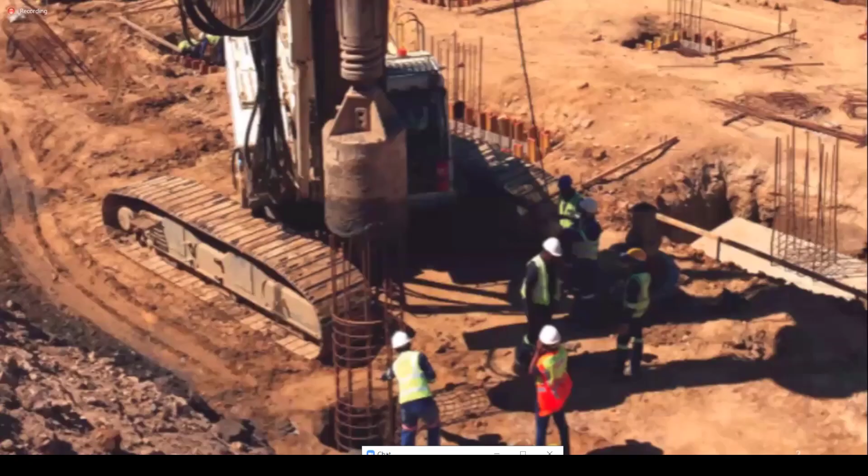So in this course, the emphasis will be on reducing the gap between academics and industry. Briefly, whatever we have shared in the course poster, you might have some doubts about the course content, how we will proceed, the course duration, timing, and other related details. So I will briefly go through the topics we have finalized after discussion.

Firstly, we will go to the basic fundamentals of soil mechanics, what soil mechanics is, since this course is mainly related to geotechnical engineering. So we will cover the basics first, we will recapitulate the principles of soil mechanics, the backbone topics of geotechnical engineering.

The second item I have put here is why geotechnical engineering, the history of geotechnical engineering, the future of geotechnical engineering, and the current state of practice, especially in industry. The items we have finalized are based on priority, based on current importance, and what is ongoing in the geotechnical field.

For example, design and principles of reinforced earth - on this topic we have already presented in a webinar. Another topic will be application of geosynthetics. Geosynthetics is a field where currently lots of work is ongoing, both in industry and academics, and this is a highly prioritized, top demand topic.

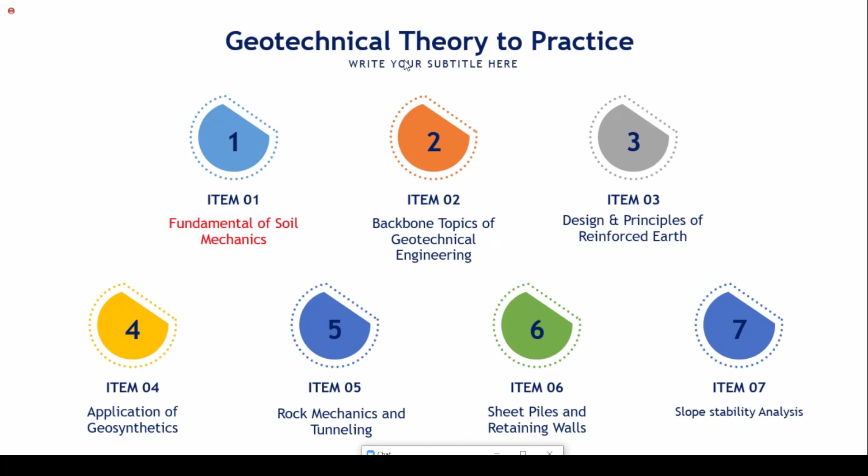So another topic we have finalized is the dynamics of soils and foundation. This is very important because of the currently ongoing industrial development and major urbanization. We need to focus not only on normal foundation structures but also on the dynamics of foundation and soil dynamics, which we used to call combiningly. This is one of the vast topics, and we'll try to cover the major missing links on this topic.

Another topic is the structural design of foundation and retaining structures. There we will cover all the structural aspects of foundation design and retaining structure design. Through this coursework we will cover all the basics, solve some numericals, and include real life case studies. We will show real life phenomena and how to deal with them using software or other numerical tools, going from real life problems to academic problems and how industry deals with these problems.

Soil anchor will be another topic. Anchoring is an important part of geotechnical engineering. Finite element modeling is also one of the important topics. Most textbooks miss this topic, but without it the industry cannot progress, because finite element modeling is essential to solve many geotechnical problems, especially field problems. If we want to do future or research analysis, we need to predict behavior through finite element models. Through this part we will learn many software essential for geotechnical engineering, how to use them for modeling, and how to achieve prescribed outputs for geotechnical problems.

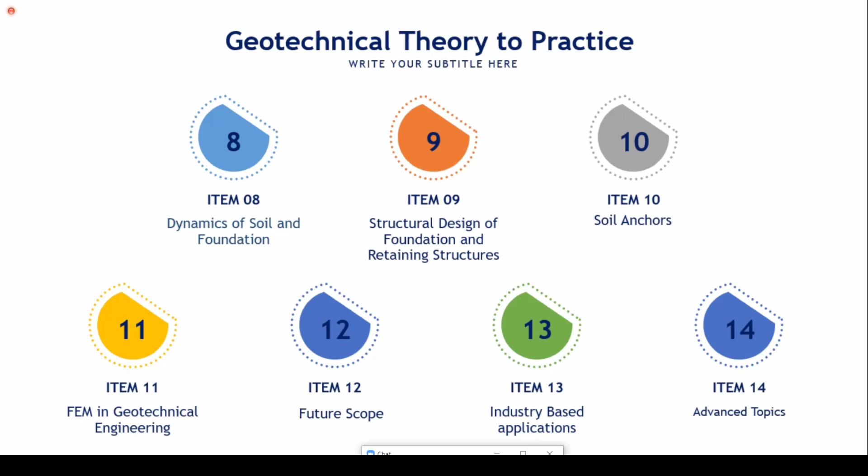Item 14 will be some advanced topics, which will be discussed gradually through the course. And then, what is my area of interest? If somebody asks you your area of interest, that is very difficult to understand—at the beginning of your career you cannot decide this is my area of interest. So this is one of the important questions, and these questions will be highlighted throughout each topic, on how you can generate your interest.

Of course, all the content will be very interactive, through any mode of communication. We'll discuss with everyone what are the difficulties or what their vision on this course is, mission as well as vision. Each and every topic has some different flavors, so we will try to highlight each and every topic in different ways.

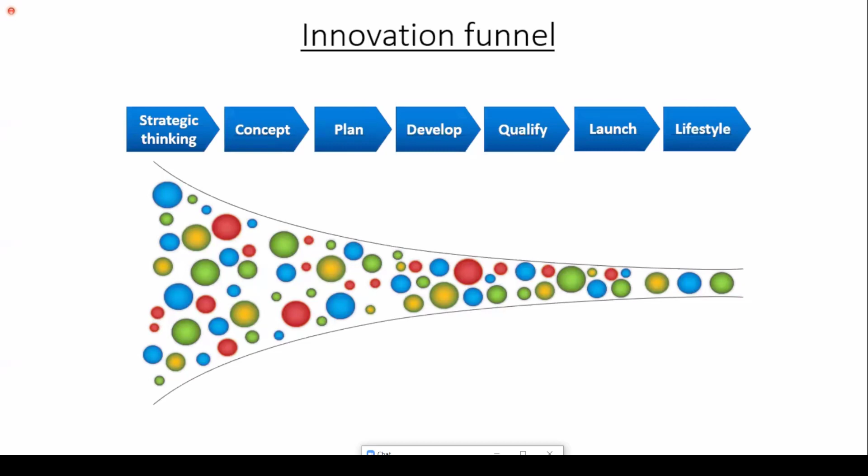Geotechnical engineering, theory to practice - in a nutshell, what we are going to study in this course. I am highlighting again the fundamentals, principles, basics, and we will clear doubts on each and every point, bringing clarity on the subject.

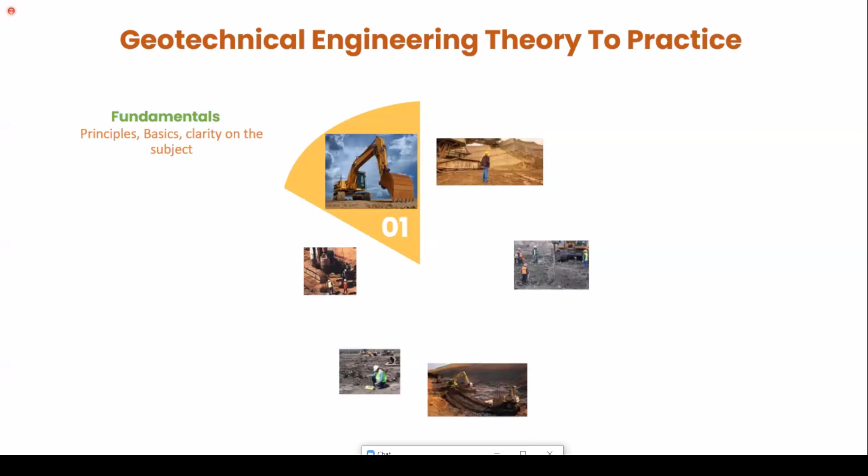Second is industry-academics collaboration - that will be one of the major prioritized things, focusing on real life problems, real field problem solving. Third is the job perspective: what will be the job scope, opportunities, and current scenario in India.

For example, one topic I didn't include deliberately in our outline is earthquake engineering, or geotechnical earthquake engineering. We covered it in the form of soil dynamics but didn't mention earthquake engineering specifically, since it's a bit saturated topic in the current world - a lot of work has already gone on in that area.

So what are the incoming, catchy areas where industry will more emphasize and focus, especially in the Indian development scenario - Indian current commercialization and rural development scenario. What topics are important - those we will highlight. So each topic will have some job perspective, what the job scope and scenarios are currently.

Fourth one is advanced topics like anchoring, piling, nailing - field related problems. There will be field demos also. We'll show field videos of what problems happened and how to deal with those problems.

Fifth, we can say multidisciplinary topics like geo-environmental aspects, such as the chemical aspect of black cotton soil, where multiple disciplines are involved - those things will be highlighted. This is one of the major interesting things about this course, because currently in industry-based applications, almost all topics are multidisciplinary.

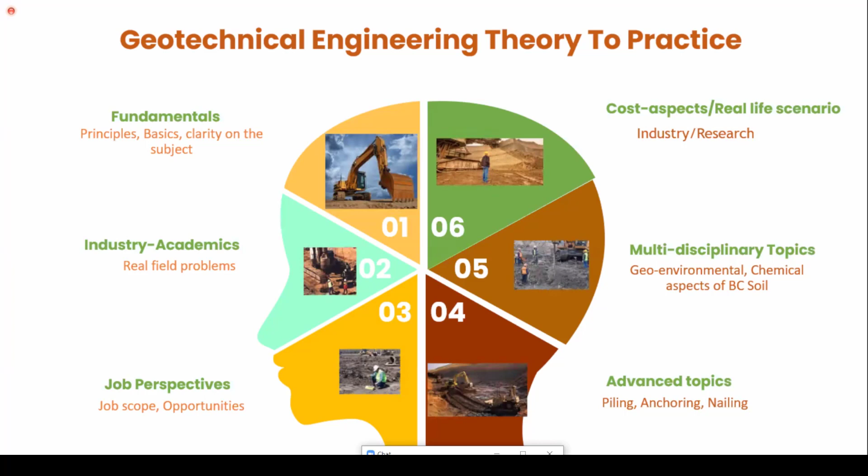What is the cost aspect of any design or project? For example, what is the cost of soil anchoring? What is the cost of soil nailing? What are the alternative methods and alternative things available? For example, in ground improvement, each topic has its own cost considerations. The cost benefit analysis, in more technical terms, of each topic will be a focus through this course.

So briefly, what we... real life part. Hello. Hello, sir, yes sir, we can hear you, sir. Please go on, okay please.

The most important part will be real life geotechnical engineering, because it's already clear that civil engineering cannot happen in the office or at a desk job - it's real life engineering. So we need to focus on the real life part of engineering, as well as basic design principles and numerical tools, and different aspects like basic principles and advanced topics, which is where we will focus in this course.

Another thing is that geotechnical engineers are mostly called in at the last minute. We should not wait till the last minute to involve geotechnical engineers. Just a reminder that geotechnical engineering is involved in every aspect of civil engineering.

For example, transportation engineering - transportation or any pavement cannot be constructed without knowing the substrata or geotechnical behavior at that particular site. Similarly, for structural behavior, we need to know the foundation and soil behavior before constructing any structure. Environmental engineering is also one of the major parts - water also deals with geotechnical engineering, how local geology and geographical behavior affect it.

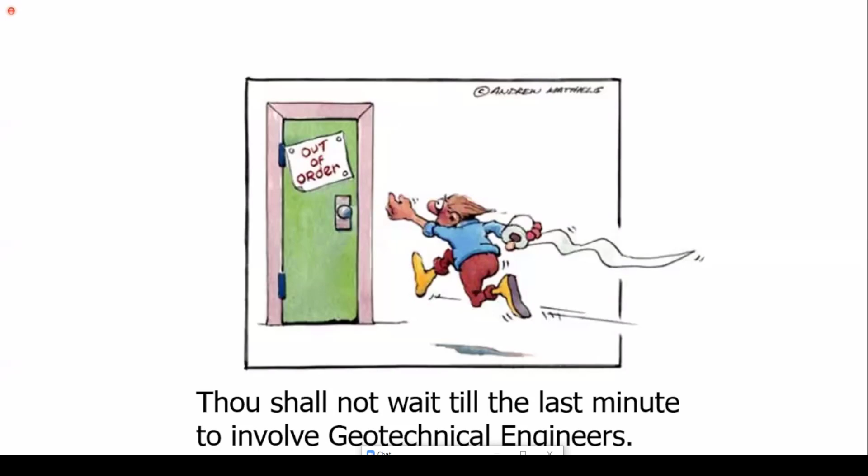So it is a multidisciplinary thing, and there are many other disciplines involved. We'll focus on all the 14 items we have discussed, with clarity about the dependency on other disciplines through these topics.

Briefly, to conclude the first part of our lecture, I will highlight the major highlighted things in our course. Soil improvement will focus on chemical injection, chemical stabilization, mechanical stabilization, and different cost comparisons of the current state, to decide the best suitable ground improvement technique.

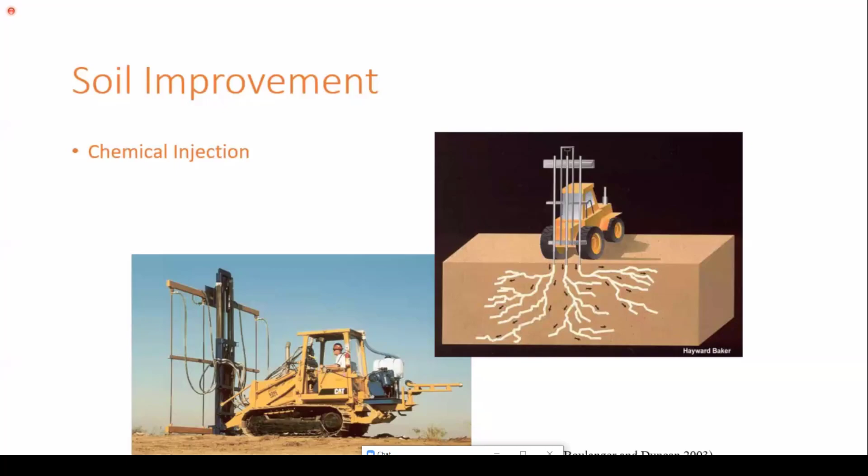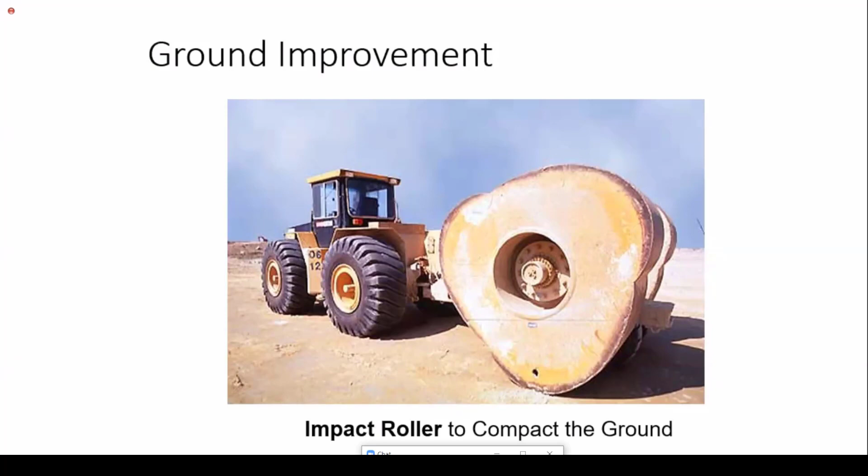There will be handouts distributed and videos shown on how to choose any ground improvement or soil improvement method, like rollers, or mechanical vibration. Every scenario, from abroad to Indian, will be considered in each and every topic.

Because of natural deposits, soil slopes, slope stability will be an important topic, as I mentioned. We'll look at the applications of slope stability, the software currently used in industry for slope stability analysis, and recent developments in this area.

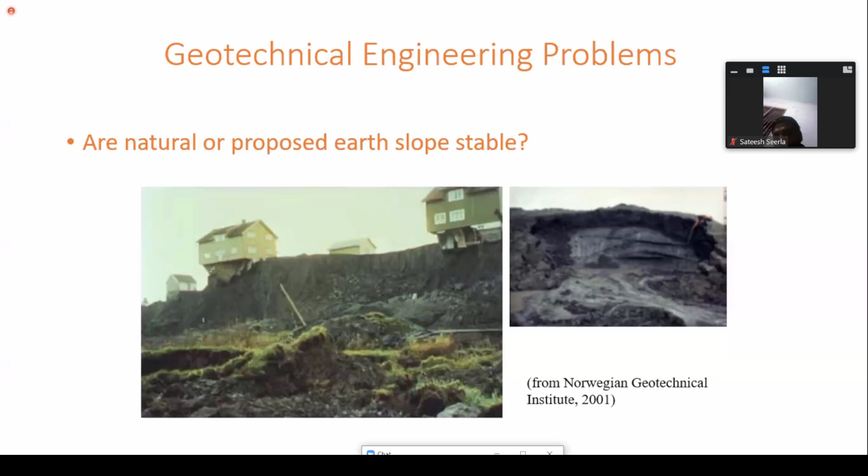This will focus in the course on unstable slopes, how to mitigate them, problems during excavation, and different geotechnical instruments. These are also major highlights.

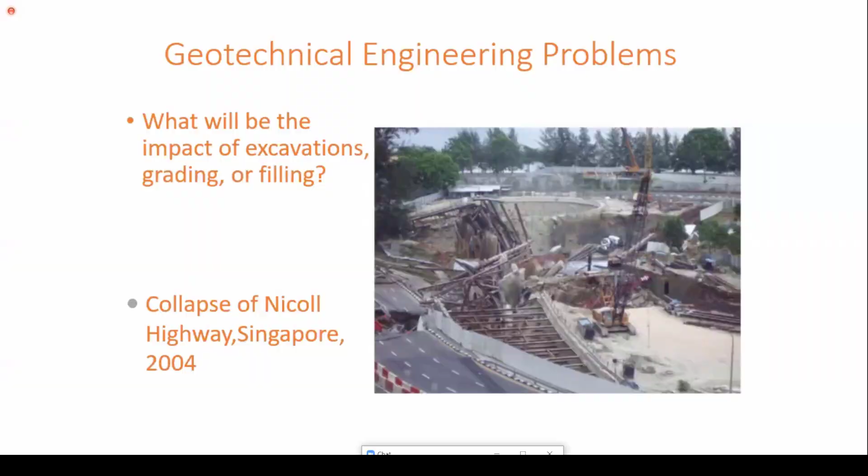Field exploration and soil exploration across different scenarios, especially focusing on the Indian scenario, given the vast varieties of soil strata available there. We'll focus on each scenario and try to find conclusive remarks, so that for a particular type of soil or region, we know which soil improvement or exploration method to use, and what special measures to take care of during soil exploration.

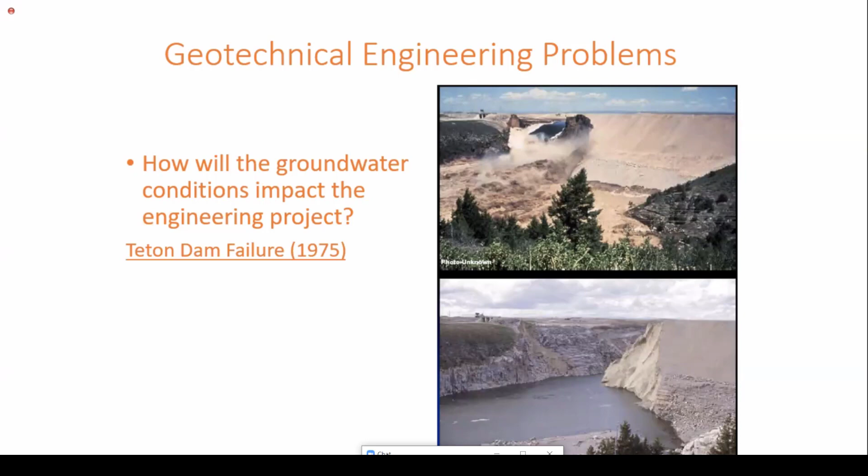Groundwater table is another part that most conventional books tend to miss — the impact of groundwater table fluctuation on geotechnical engineering or any geotechnical structure. We'll start this topic with dams, different dam failures, and how to do dam stability analysis.

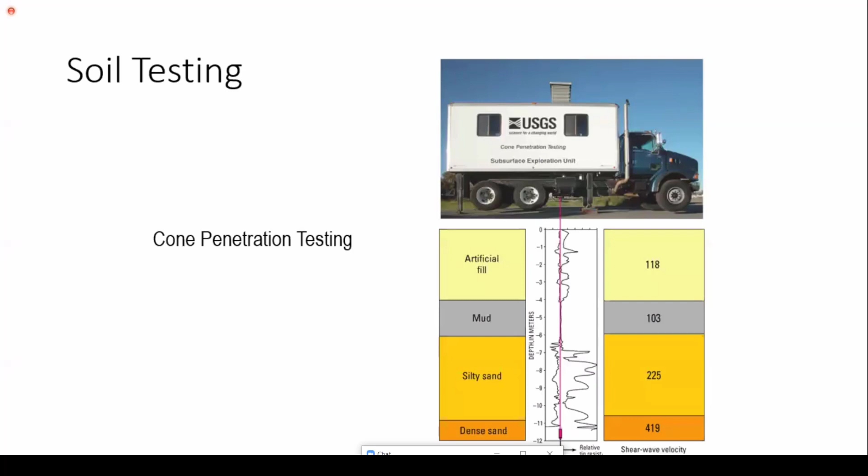This soil testing topic is especially important. Currently industry mostly considers the SPT test, with development into the cone penetration test (CPT). How to choose soil testing, for example to evaluate dynamic soil properties, depends on what type of soil is present. There will be a flow chart for each topic regarding soil testing — shear test, standard penetration test, every aspect, every pros and cons of testing will be considered.

I didn't make a separate item for soil testing; that will be part of each and every topic itself.

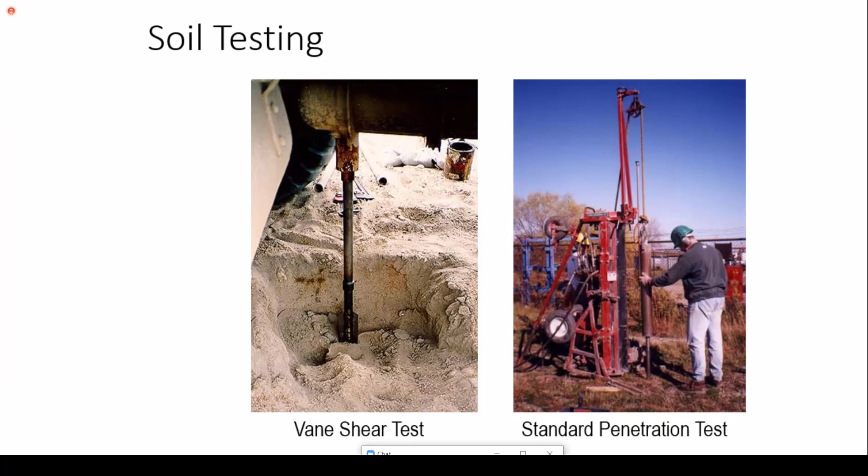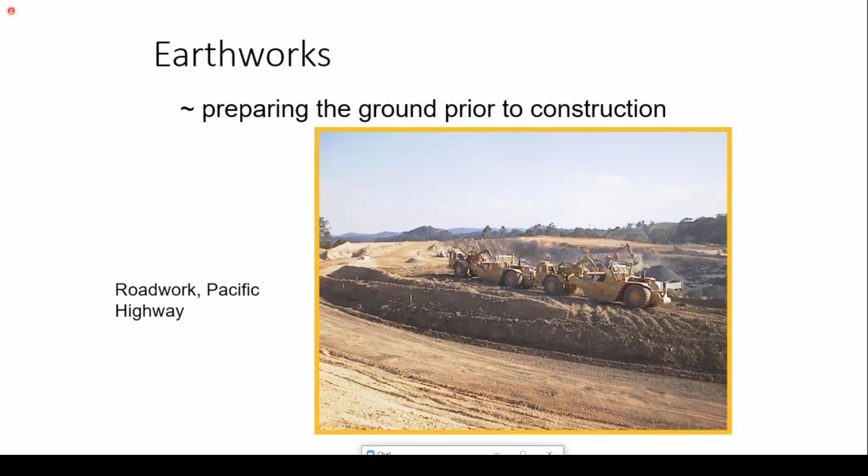Earthwork is also one of the topics. To construct any road work or excavation, we need to consider cutting, filling, and earthwork, including prior ground consideration and preparation before any earthwork.

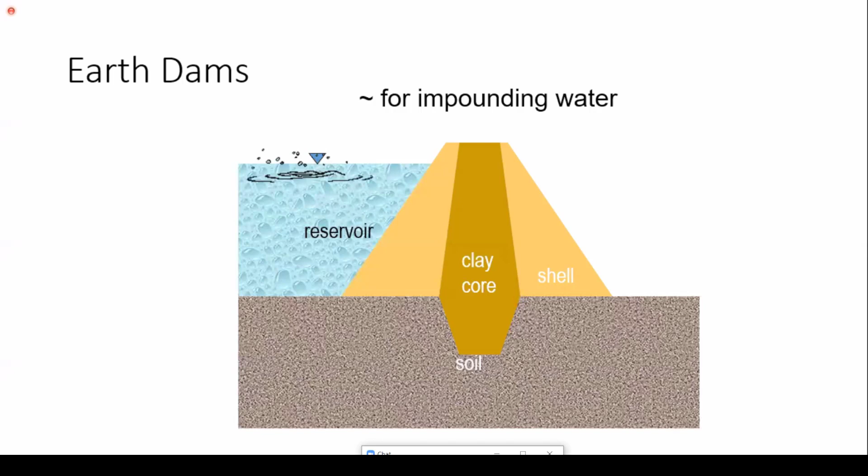Earth dams, as I mentioned, will be one of the emphasis areas, especially after slope stability. We'll consider the impact of dams, and for each type of soil, show the construction aspects based on dam construction. That is one of the major highlights of this course.

Tunneling is one area we will discuss today, with part of it shown in the demo presentation. Tunneling has huge prospects in India — it's already happening, and there are many field-related problems faced during tunnel construction. Advanced equipment has already been developed, and more will be developed for tunneling. So tunneling construction will be a focus in this course on rock mechanics and tunneling, and I've put that course content in the topic itself.

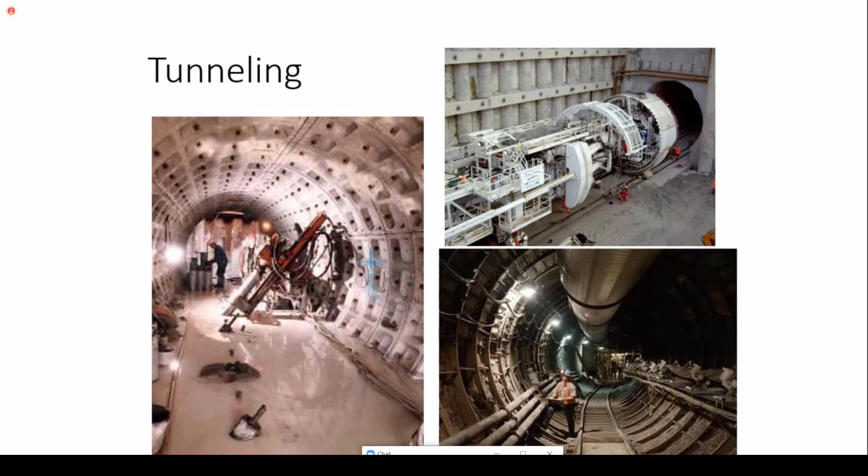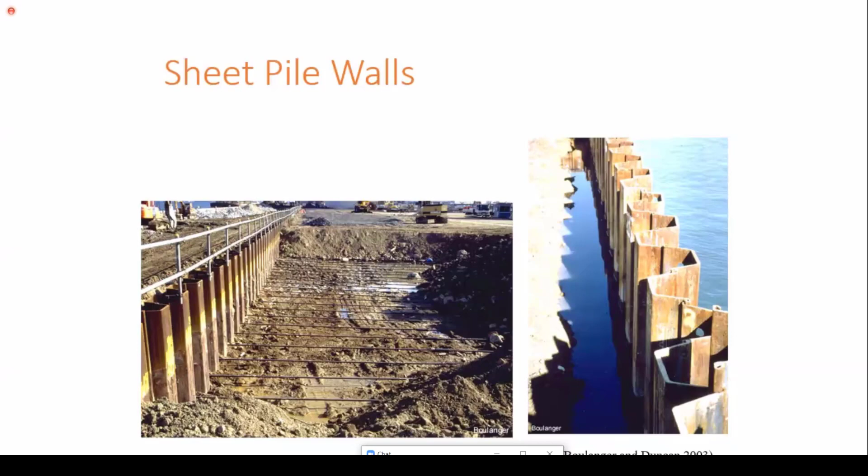Sheet pile and retaining wall — we put this topic separately. The sheet pile behavior and retaining wall are also an integral part of geotechnical construction.

Retaining structures - we've discussed reinforced earth walls, but retaining wall construction, design, field failure analysis, and field troubleshooting are also important. There are different problems we encounter in the field, but troubleshooting cannot be learned just from reading a course book. There's no separate chapter covering what problem and what solution - this emphasizes real life scenarios, the challenges faced during retaining wall construction, and what solutions a geotechnical engineer should provide.

That is one of the major attributes of a geotechnical engineer - to provide real life solutions. Suppose someone asks what problems we're facing at the site and what we should do - what flow diagram, what should be going on in your mind - we will discuss this through this course.

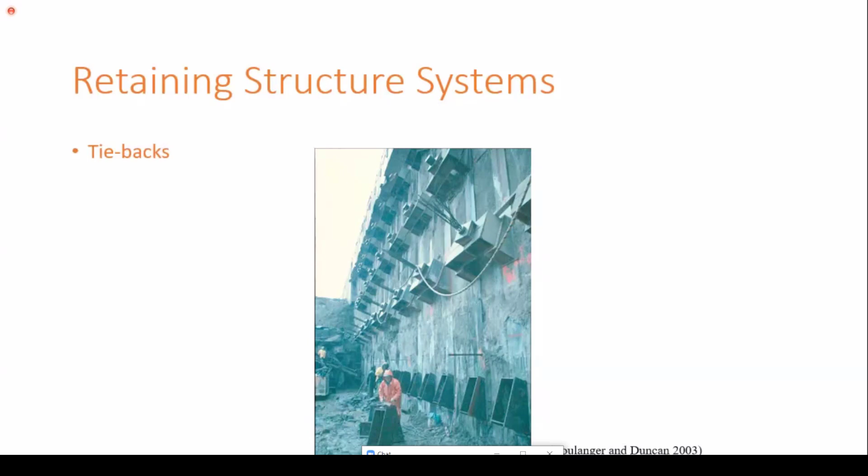Next, gabions are a different part of retaining structures. That's why I didn't mention retaining walls separately - we will focus on all types of retaining structures, not only retaining walls.

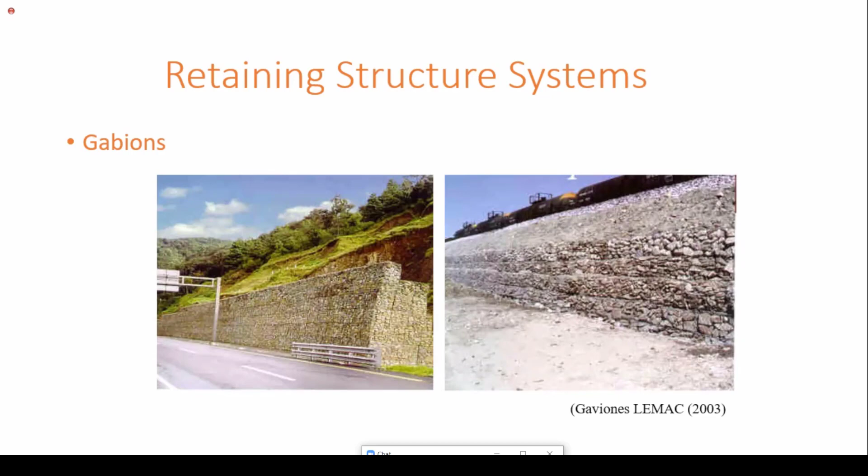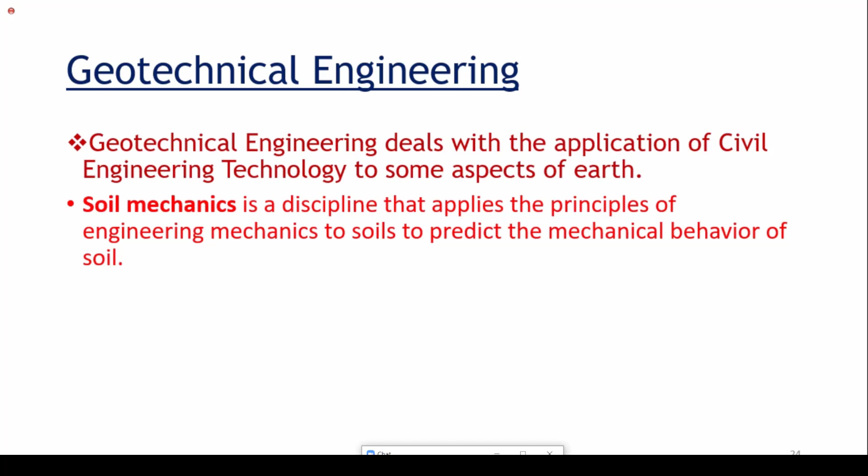Next is basic geotechnical engineering. To summarize, geotechnical engineering deals with the application of civil engineering technology to aspects of the earth. So earth will be one of the aspects, and taking that as the basis, we will focus on other aspects also.

We will focus on something very essential but not mentioned in textbooks, like long-term phenomena - the long-term behavior of materials such as geosynthetic material, retaining walls, or dams. Also consideration of environmental effects like heat, moisture, and pollution intrusion - these effects we don't normally consider during design or analysis of geotechnical structures. We will consider this also in this course.

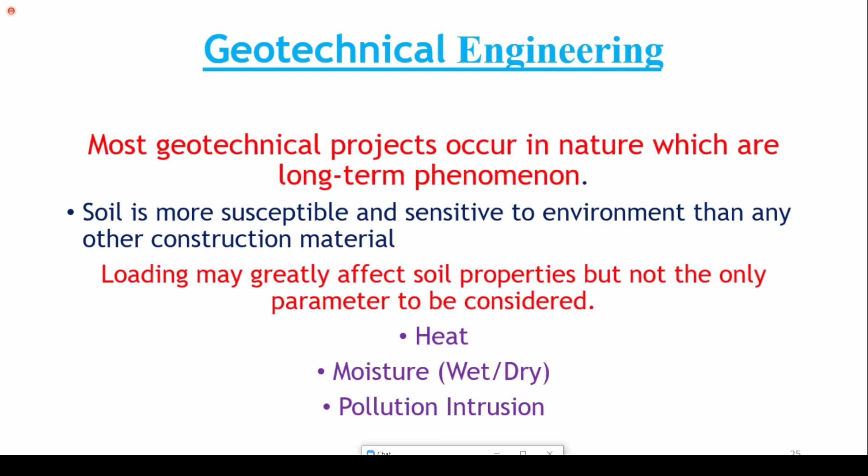These are just a few flaws to give glimpses of our course material - we'll focus on all types of flaws and gaps in the current state. For example, the current state assumes specific gravity and Atterberg limits of soil are constant, but in real life these are not constant.

Void ratio and porosity are indicators of soil deformation, but only these two things are usually considered, while there are several other factors for soil deformation. For example, water in the soil mass is mainly considered gravity water, but there is also viscous water and environmental water - we will discuss aspects of those waters.

In real life, soil is not fully saturated - it's a partially saturated material. So here we will discuss a few parts of unsaturated soil mechanics. Flow through the soil mass is due to hydrostatic potential, and we will also consider thermal, electrical, magnetic, and chemical effects. This will be emphasized through the course outline, focusing on different aspects of these flaws.

Constitutive models are arbitrarily chosen - the stress-strain relationship of soil or any geosynthetic material is arbitrarily chosen based on case-specific factors. So here we will try to find out how to deal with this type of stress-strain relationship and how we can predict the behavior.

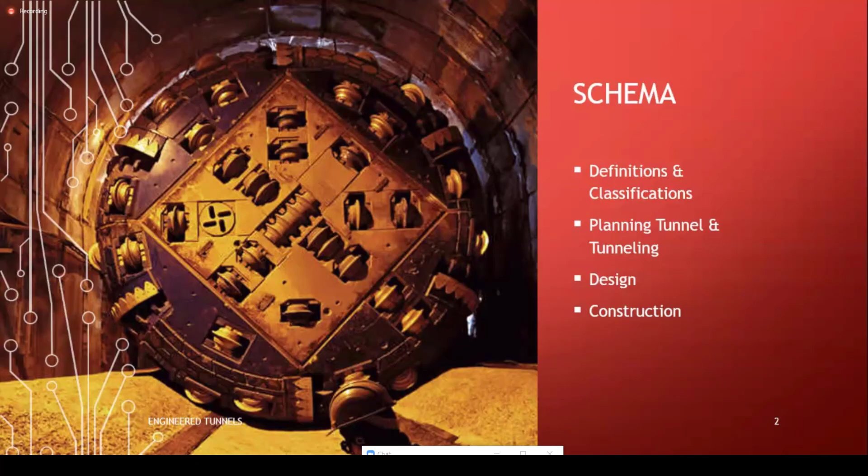This tunneling part - why I have chosen this - I will show today the definition and classification. There are lots of tunnels already in India, but there are a huge number of tunnels under construction ongoing. So why did man go underground? This will be the first question, because tunneling is an underground structure. So here again we are finding out a more specific topic of geotechnical engineering.

This is also one of the advanced topics, because after studying basic geotechnical engineering, after studying rock mechanics, we come for tunneling. So we have to give a brief introduction about all those topics, and we should maintain the flow between the basic things as well as the advanced things.

So why do we go for underground structures? We need to go for underground structures because of mining operations, for public works - we may need to construct pipelines, sewerage lines, for transportation, of course, because of metro lines, even train lines, even for high speed trains, we need to go for underground operations. Nowadays space is one of the important constraints for civil engineers, and there is lots of congestion because of industrialization and urbanization.

Space is very limited, so we need to go underground. Underground structures are essential. So let's look at one underground structure - this is also one of the special topics of underground geotechnical engineering.

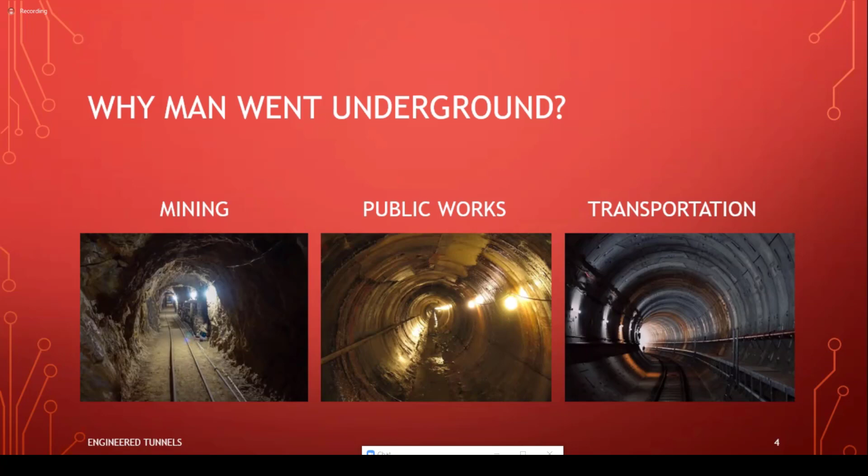So there are certain guidelines for tunneling. We will focus on those guidelines also, but for today's workshop we will not go deep into each guideline or discuss the shortcomings, pros and cons of each topic.

A pipeline is usually not considered a tunnel. There may be different dimensions of pipeline, but the purpose differs - that's why tunnels can be divided in different ways. One way is by purpose. So pipeline is not a tunneling topic; pipeline geotechnics is also a special topic in geotechnical engineering.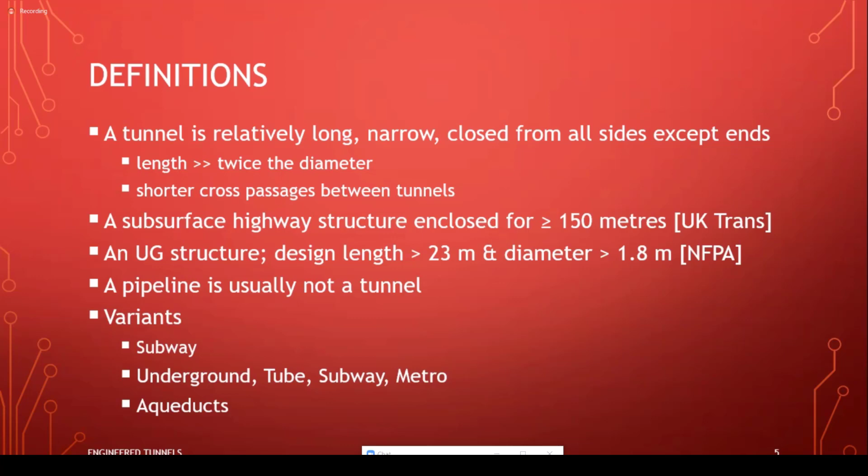There are different variants of tunnels - subway, underground tube, metro, aqueducts. These are different ways of classifying tunnels. I will not go deep into tunnel classification now; we'll come back to this during our course curriculum, focusing on tunneling technology and different aspects of tunnels.

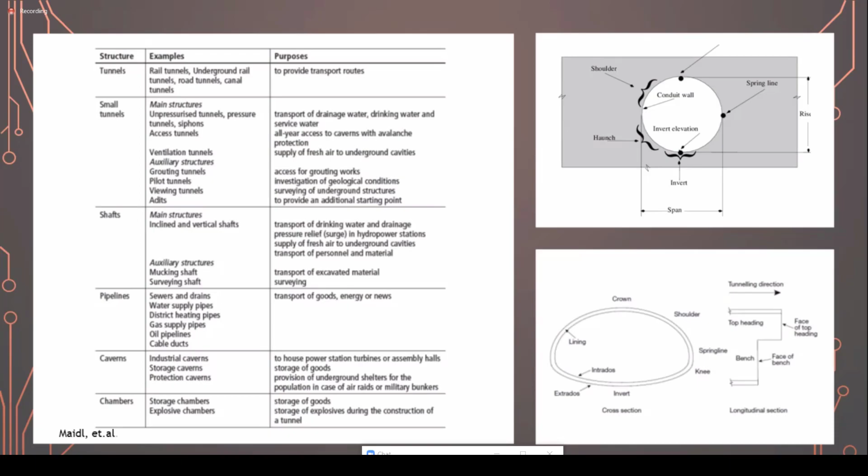It may be classified in terms of material, in terms of aspect, or in terms of the purpose of construction. So in broad classification, we are just giving a brief overview - purpose-wise, geological condition-wise, shape-wise, material-wise, we'll have different types of tunnels.

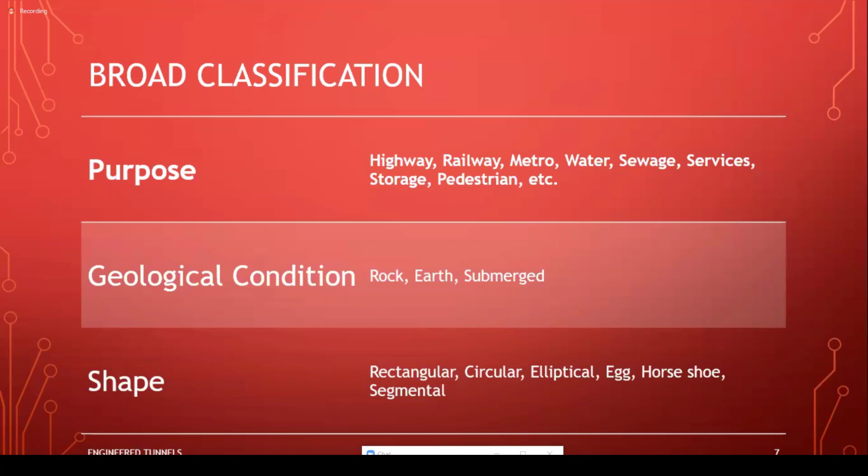Just to give a brief idea of the different tunnels available, different shapes - from different heights to different lengths, and different materials to different purposes, there are lots of broader ways of classifying tunnels.

So, planning tunnel and tunneling - how to plan a tunnel construction, how to be sure that here we can construct a tunnel. It's a very big subject with lots of technologies involved. We first focus on geological strata, subsoil exploration, how to read a subsoil exploration report, what should be the depth of exploration, what should be the geological behavior, and how to study it. Suppose someone gives you a subsoil exploration report - how will we study that report, and from there determine whether we can construct the tunnel or not.

So the key concern is the purpose. One thing we will find out is that purpose is one part - size and cross section of construction will be decided based on purpose. Ground stability is another part, where we'll find out the alignment and feasibility. Construction method, yes, this is one part too.

Time and money are both essential and linked factors. We cannot take too much time to construct any kind of structure, and we cannot spend too much money constructing any geotechnical structure. So these are two constraints regarding construction method - there are many advanced technologies and construction methods, but not everything can be applied due to these two constraints.

Removal of debris is another challenge, because due to the underground nature there will be lots of challenges. Those challenges are important too - for example, water will be another effect, as we have to pump out that water before going to construction.

So we'll study this not only for tunneling, but for every topic we'll go deep into this type of behavior - what are the challenges, what are the different obstacles we will face as a site geotechnical engineer, not only as a design geotechnical engineer. Design geotechnical engineering also comes from the site aspect itself, so we'll try to collaborate these two things.

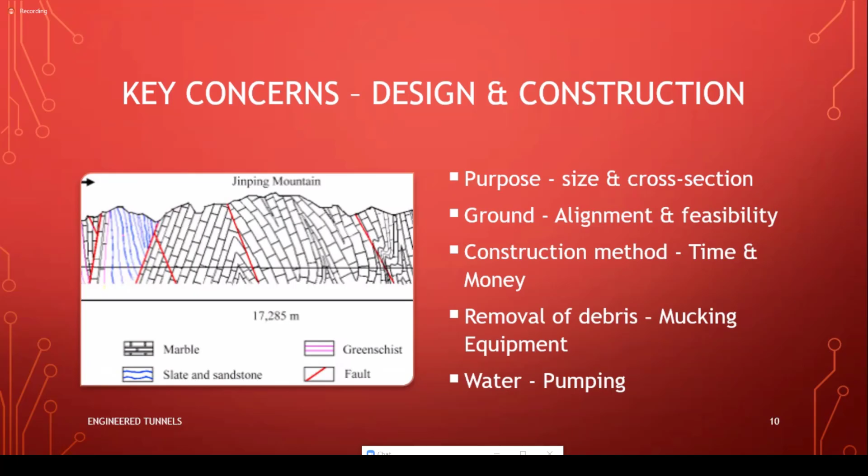How a site geotechnical design engineer and a design geotechnical engineer will deal with the problem, and how the overall construction will happen, and how the complete structure will be constructed on different types of geological strata. So we are briefing how tunnel design or tunnel construction happens.

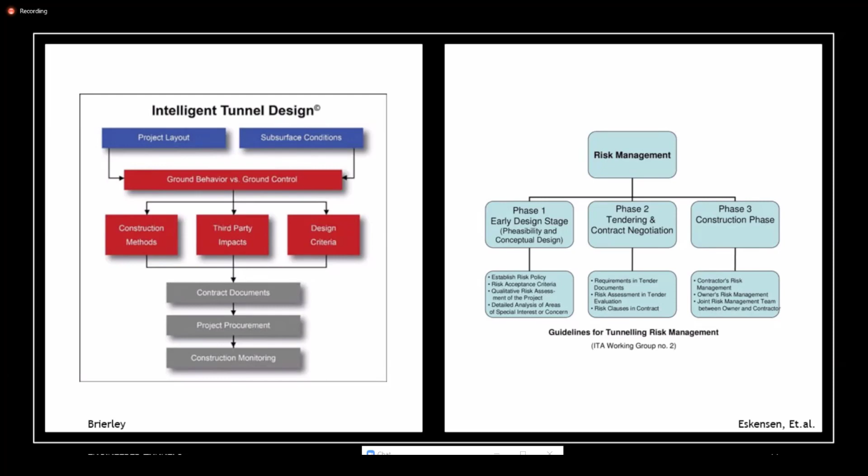There will also be a management part involved, such as how the designer consults third parties, how we check the design, how we take the client's approval, and for design philosophy changes, what barriers we have to overcome. Not only technical ways, but also management ways will be discussed in this course.

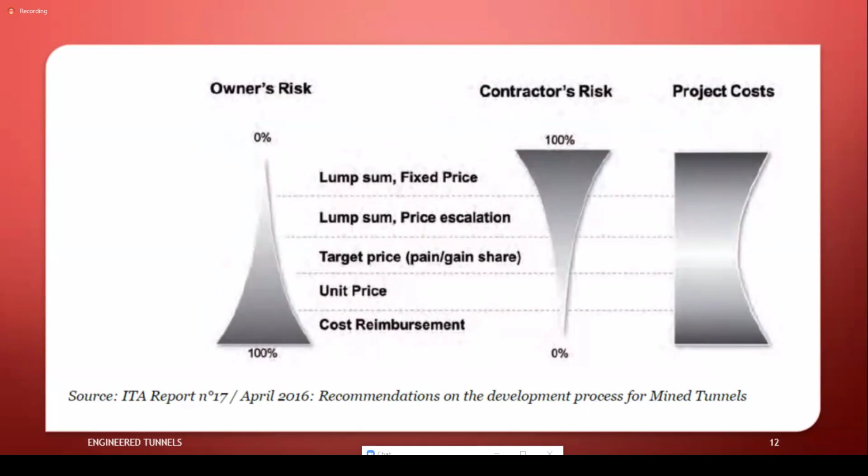We'll discuss contractor and project terminology before going too deep, and how we make the tunnel construction happen, because there is huge cost involved in any geotechnical structure construction. So this aspect we'll discuss.

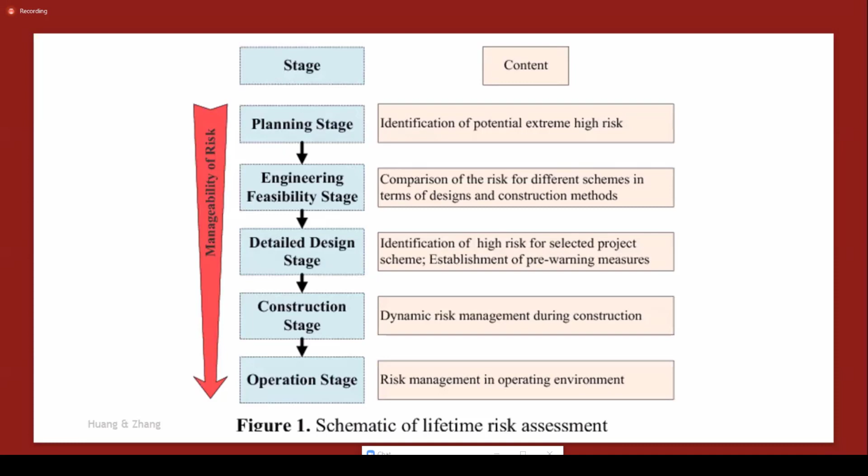There will be some risk assessment of the tunnel design. We'll discuss the different stages and how we'll take care of them. Not only for tunneling, this applies to other things also, so we'll have generalized guidelines. For example, for soil anchoring, how things will happen, how we have to go step by step, this we'll discuss.

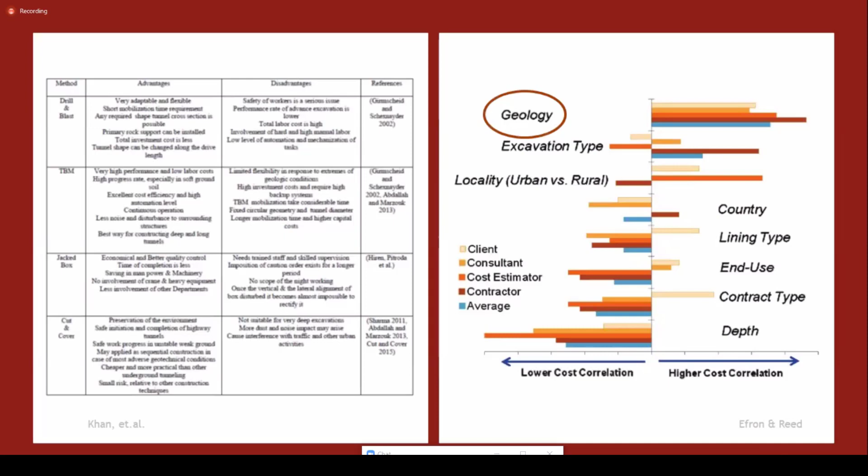We'll compare how things are happening in India versus abroad, especially geological issues, how to deal with different codes, and how to deal with cost, because in every country's standards there are different guidelines, so we'll focus on those things.

Design part again - I'm skipping many things since this is a demo presentation. The design part will focus on the basics first, such as what is the basic of any geotechnical structure or behavior. For example, in tunneling there's the importance of earth pressure theory, which we'll study in the second outline, covering different basic things with flow between each topic so we can go step by step.

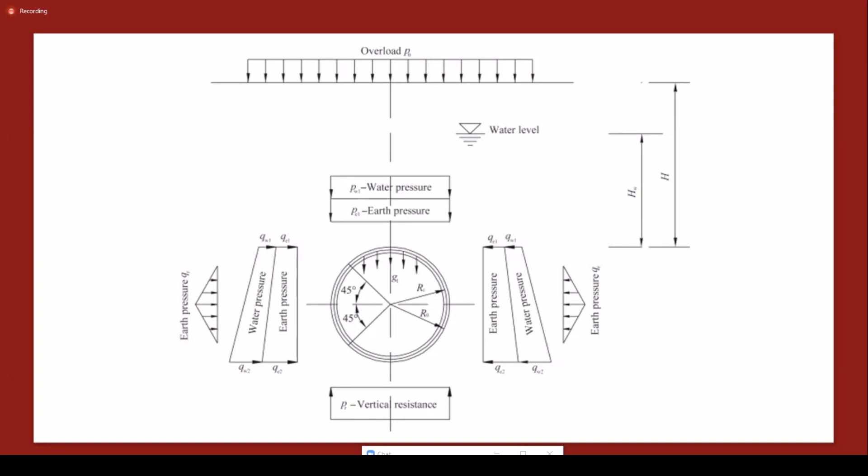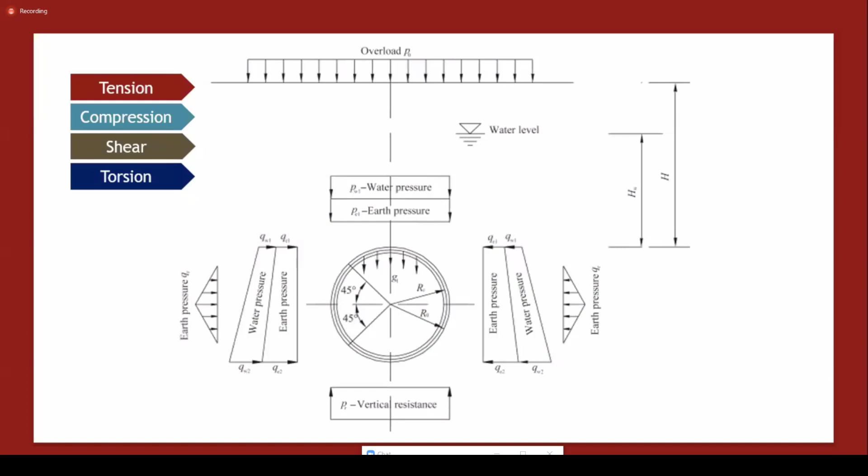Basics will be covered in the first lectures, and that basic knowledge will link into subsequent topics. So here I'm showing how to deal with tunnel design, how tunneling happens, and this will come back again in the tunneling and rock mechanics outline course itself.

The difference between design of surface and underground works is another aspect. We need to focus on what type of construction requires tunneling - whether subsurface, surface, near surface, or very deep underground. All these things control your geotechnical behavior and change your construction process, sequences, and methodology.

This construction aspect is not only technical - it's one of the important parts, and most civil or geotechnical engineering books miss this construction aspect of tunneling or other things. We mentioned 14 such points in the first presentation itself. Soil material behavior is also important, as soil is a natural material with huge variation.

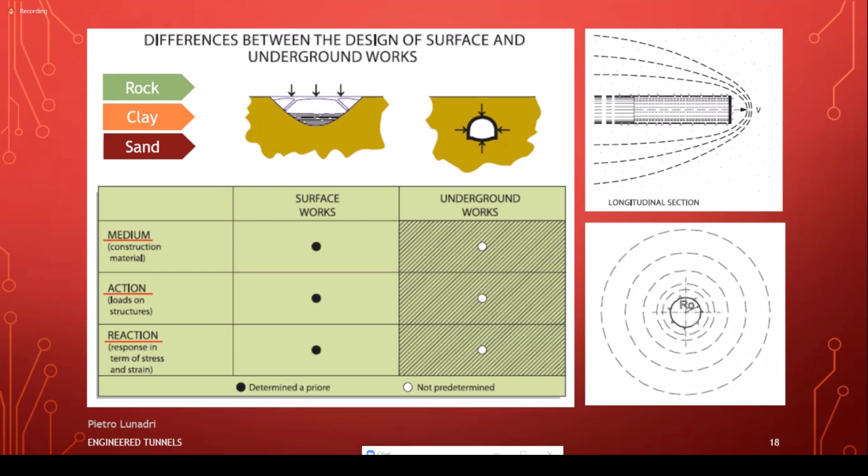I'm going fast through this presentation regarding construction aspects. For example, testing - we'll read about different instruments and methodologies, the pros and cons of different testing methods, what soil tests to use, and how to deal with them. As a geotechnical engineer, if a third party gives you a test report, how you interpret it and apply it in design and construction.

This will be the general flowchart for everything. For tunneling, there will be specific testing that comes up, and we'll cover all these topics. This is important - there should be a linked generalized flowchart for everything. There may be chronological or testing procedure changes, but how we study this course, how we approach each topic, the overview and framework will remain similar for every topic.

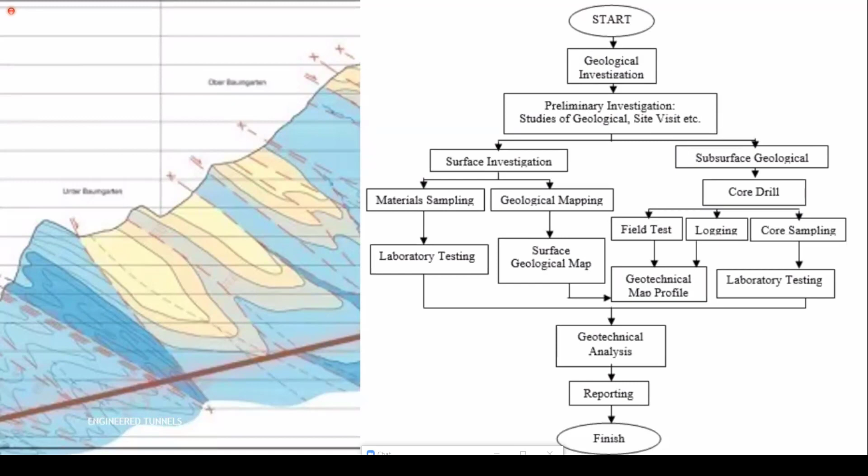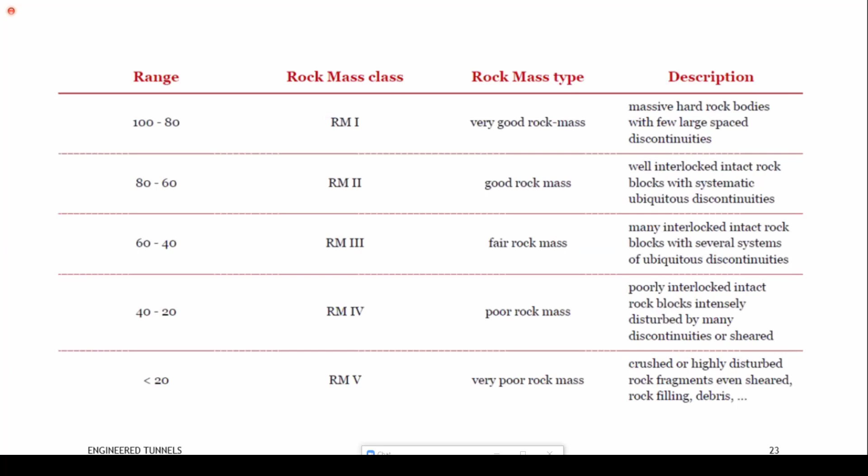Since this is related to rock, we have to recapitulate the theories on rock mechanics. I'm not going deep into the rock topics, but we have to focus on soil as well as rock, because geotechnical engineering covers both. That's why in the first presentation I mentioned the difference between soil mechanics and geotechnical engineering. Geotechnical engineering covers soil mechanics as well as rock mechanics, what we normally call natural earthen materials. Both soil and rock will be covered in this course.

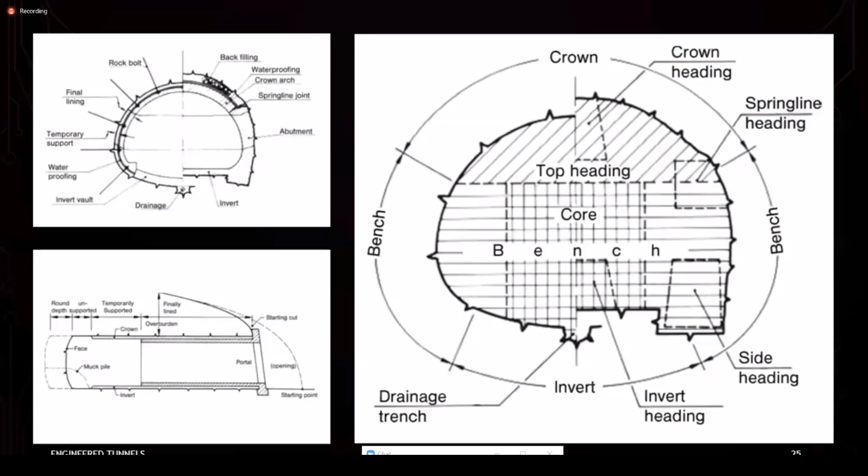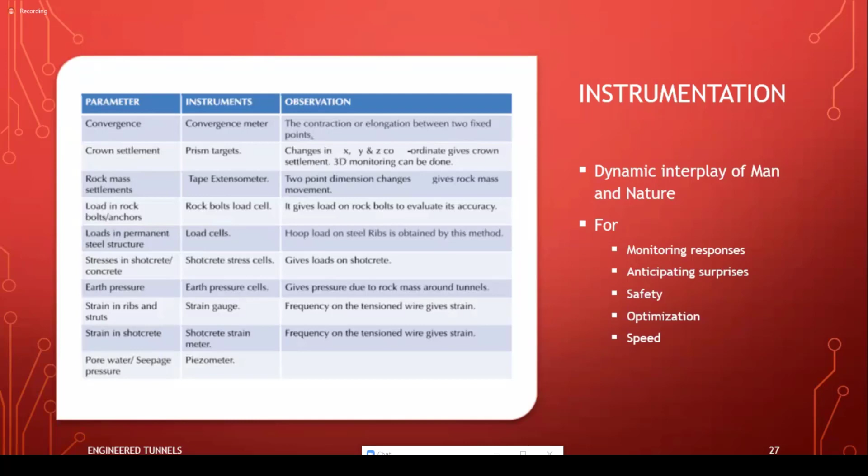We are going to cover a few different aspects of tunneling. I will not go deep into tunneling technology or instrumentation, since instrumentation will be different for different topics. We'll cover this in detail through subsequent videos and case studies, focusing on different methodologies, for example the cut and cover method. This will be a generalized term. First we'll define the term and the terminology, since each and every terminology should be clear, and this terminology will apply in the methodology and the process. Then we'll discuss how to apply it through different instruments, such as how to make cut and cover method, in detail.

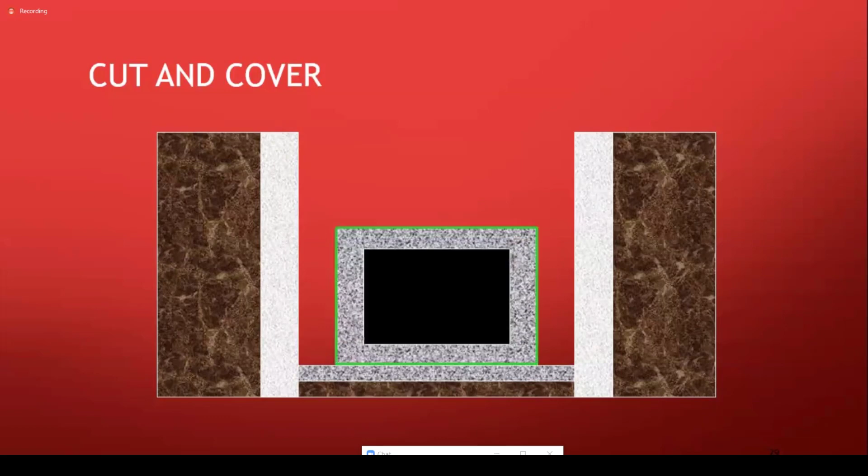Similarly we'll discuss other methods, for example the bottom-up method, top-down method, and different construction methods. On this tunneling part I'm stopping here for now; there are other methods, and for tunneling itself we'll spend lots of time after covering rock mechanics. I put tunneling as the seventh topic, I guess, so I'll come back to the tunneling part again. I hope tunneling, like all the other interesting topics, will be covered, and each topic will have some interest.

I guess you will find this course very interesting, and I am expecting all of you to be very interactive throughout this course. The more people join, the better; I am expecting more people should join so this becomes a successful course, and we should reach the goal of bridging the gap between industry and academics. This is the main objective of this course.

Getting back to this time, I'm telling everybody, if you have any doubts or questions, just raise your question related to the course or any technical topics, and I'm happy to share all those things. This is a demo presentation; I'm going much deeper in the actual course. Please share your doubts and questions.

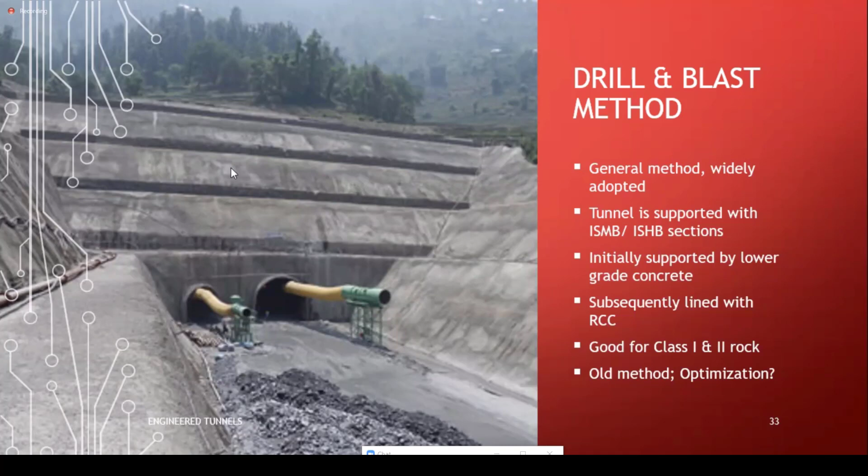Thank you so much, sir, for the demo you've given till now. Sir, can I request a minute to explain today's offer? There's an offer going on, so I'll request a minute's permission to tell them about it. Sure, please discuss this, I will stop here. Thank you for sharing also. Are you sharing your screen? Yes sir, I am. Okay.